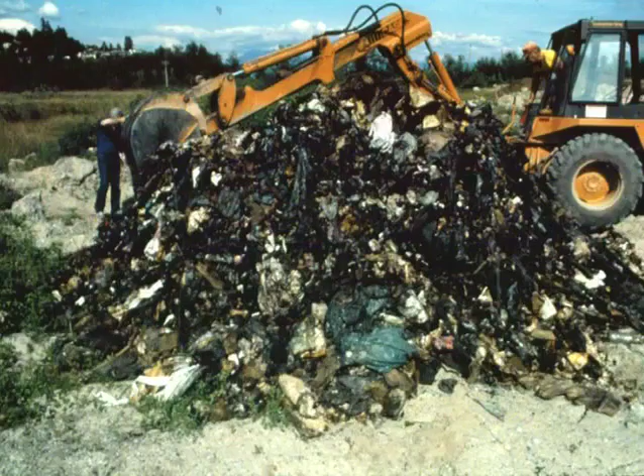First of all, I want to show you what material we're talking about. This is garbage. Jean-Louis tells me that I'm very good at presentations, in fact it borders on excellent, but I'm excellent in telling people what not to do, he says, and he said please don't do that this time.

Well, I'm going to at least suggest to you that this material does not lend itself to vane testing. It doesn't even lend itself to the Briaud pressuremeter. It doesn't lend itself to almost anything. This is what it looks like when you dig test pits, and there's not much you can do about it. That happens to be a trophy I just found, an old hot water tank.

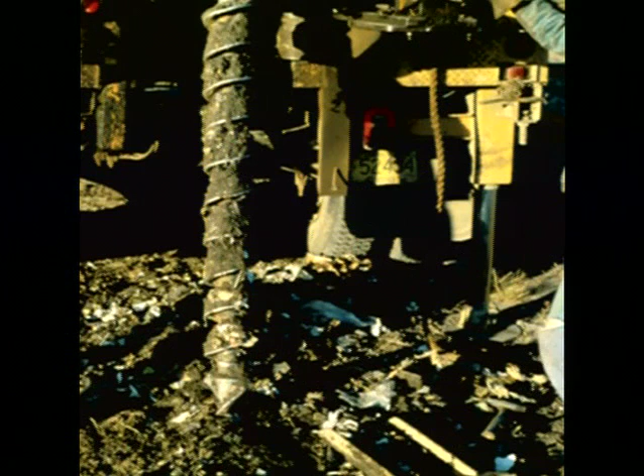It's possible to use augers, and I ended up with a minimum size 6-inch solid stem auger. You can get samples in just about any garbage, and I've tested them all the way from Paris to Vancouver to Florida.

If you use a Becker drill, though, well, you shouldn't. That's what's going to result, it's going to get plugged right away. So to use a Becker drill in garbage, in landfill, seems to be impossible. I certainly wouldn't recommend it.

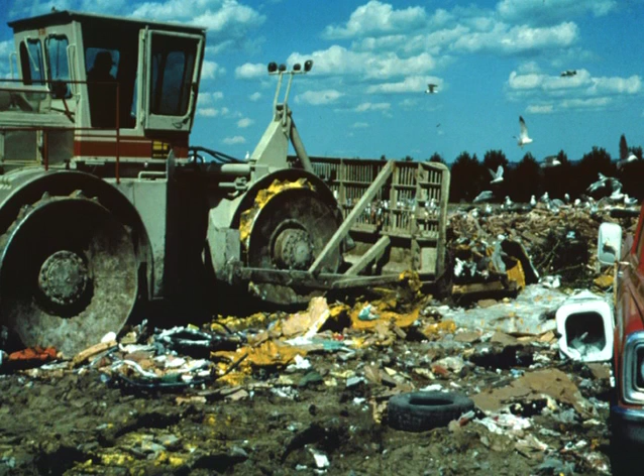Compaction in garbage, in landfill, certainly is related to ordinary, conventional compaction, but usually what you do in conventional compaction is getting the grains closer together. In garbage, you want to crush the grains, so these pallets here, when you let the right kind of sheep's foot type roller compactor on it, you crush the thing, and you do the same with the steel drums. They practically disappear. If you don't do that, you end up with a lot of voids in the landfill, which you don't want, because it will deteriorate, it will decompose.

Classification of this stuff means that you simply have to separate these things apart, take them apart, and this happens to be... if you can't see, if you can't read, it doesn't really matter. What matters is that you have all these different constituents. Paper usually is about 40 to 60%, and so on.

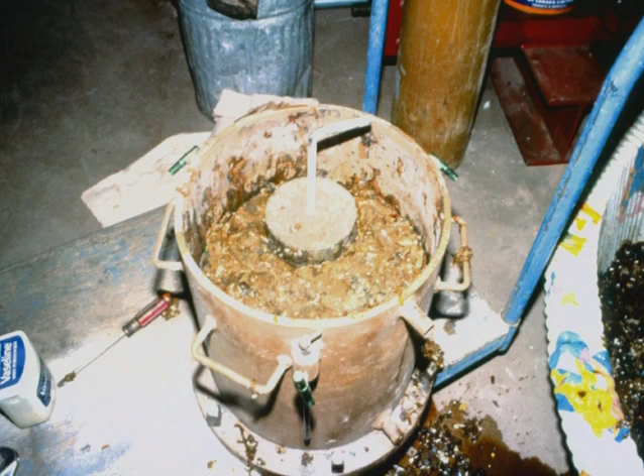The technique that I finally ended up with was to take samples either in test pits with an excavator or a backhoe, or with a bucket auger. Fairly expensive, of course, but that works. Then reconstitute the samples in the lab to the same density, and then test it.

What you're looking at now is compressed garbage, compressed fill, refuse, and it's pretty dense when it is compressed. You, in fact, don't see any voids. The void ratio of a compressed garbage is very small, and it means, for example, that the water content is not all that important with respect to unit weight.

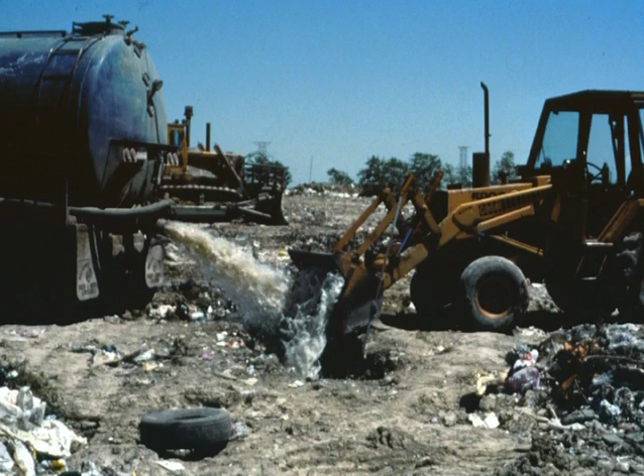And finally, we're looking at sort of a Mickey Mouse, but a large-scale percolation test, where I just got hold of one of these big tanker trucks, and then used a little backhoe there, filled it with water, and did the percolation test.

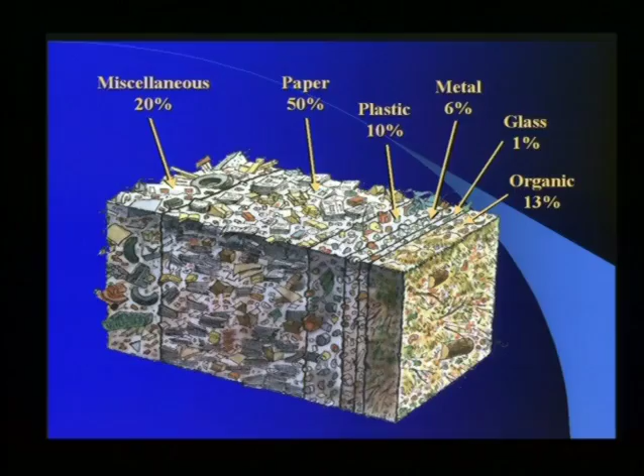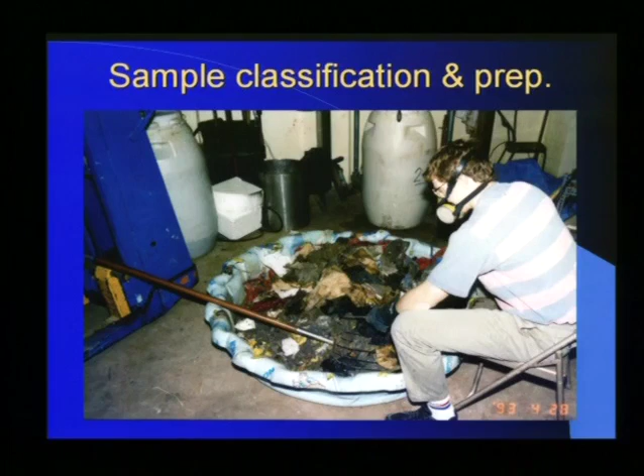And they are very nice to turn to when you have to classify the stuff. They are separating and having fun. Another graduate student who survived, and he has a pretty good job.

Garbage, when you read papers about garbage or landfill or refuse or MSW, whatever you want to call it, you often find a whole lot of negative stuff. People saying how difficult it is, how difficult it is to determine things. It's not quite as hopeless, I think, as people seem to think.

For example, we know pretty accurately the specific gravities, or as I've called it here, the unit weight of the solid constituents. We know that the paper products, the paper, is organic. So organic is 14, and if you're not used to kilonewtons per cubic meter, then 14 would correspond to about 90 or something like that. 70 is of course metal, that's steel, that's very high, so it's about 7 times 62, so it's over 400. And you're all familiar with these things.

We know the specific gravities. If we could just separate these things, and we can do that given enough graduate students, then we can actually calculate the average specific gravity. And from there we can go back to soil mechanics, and we can find out void ratios, except we do have to distinguish between intraparticle and interparticle, that is, between particles or constituents and inside them.

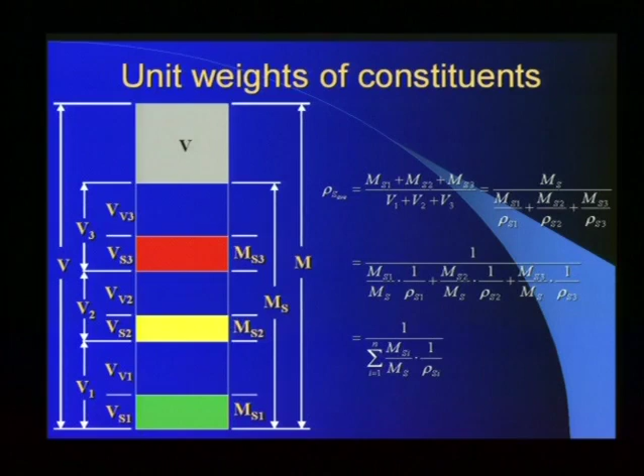The colored portions are 3 constituents, just picked at random, 3 different ones, and you don't have to read the equations. It's not difficult to understand, because what the first one says is that the density is equal to the mass divided by the volume. So there's nothing new, except now you have 3 different masses and 3 different volumes of them, and we can pretty much measure that. We know the densities, and we can weigh them. So since we can weigh and since we know the densities, we can find out the average density, which is the last equation there, just a summation of all of them.

And densities, up till really just very recently, I had the same tendency as we all seem to have. We look at some figures and we say that's not possible, our theoretical considerations show that it can't be so, and so on. I have tried to stop doing that and actually looking at results.

All those yellow dots there, the little squares, are measurements I did myself. So I know there's no cheating, I just took the thing up, excavated it, and weighed it on reliable scales, which at times I made sure were calibrated. And I measured the volume with the thing we tongue-in-cheek called the pitometer, which was just a long stick with what happened to be a pump down there, and we measured the diameter, or rather the width of the pit, and the length of it, and so on. We measured these things at 50 different points, and then it was fairly reliable, I would say. And you see those results there.

Now, it's very typical to say that the unit weight is very important, of course, for stability calculations of the stuff that is underneath this. For example, the Fresh Kills on Staten Island, 500 feet thick. It will never fail, in my opinion, within the garbage. But underneath there is a soft clay, and that might fail if you're not careful. And of course, then it's going to be extremely important to know what the unit weight of this stuff is, and also what is the lateral force that it can exert. So we have these two things that we have to find, and I think I have found those, and I now believe those high values.

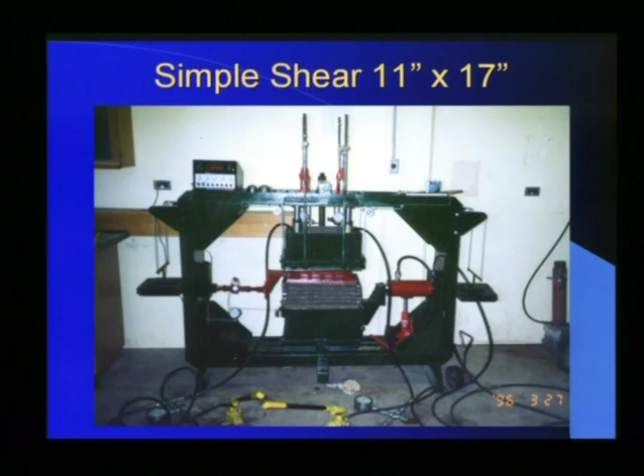So 11 by 17 is a minimum, like a foot long and a foot thick or more, because the material is of course rather coarse. That one used to be a direct shear, but I fixed it up so we could use it as a simple shear.

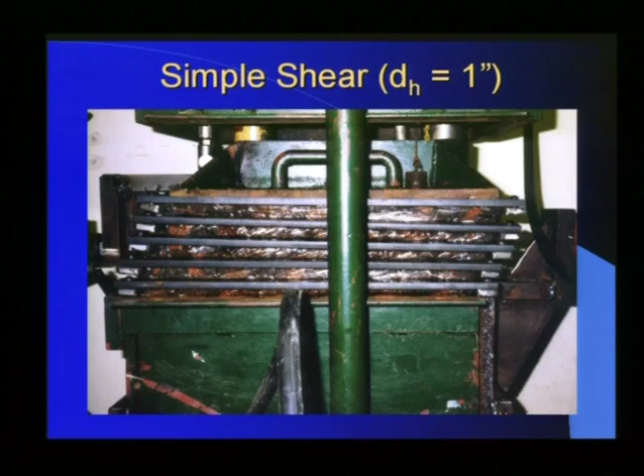Simple shear before the shear, after compression and before the shear, and after about 1 inch of deformation or displacement. But the important difference between direct shear and simple shear is that in simple shear you know the actual shear strain, which equals the horizontal displacement divided by the thickness of the shear zone. And you know what the shear zone is more or less exactly, so you can get that.

Just another picture of compressed garbage. It looks different - you'll recall the first slide I showed you, all that stuff. And now this one is very, very dense. No wonder it has a fairly high unit weight.

The shear, if we go back to direct shear, there is a tendency to always use C and phi, as you Americans call it. C and phi, I mean it's there to stay, so there's not much we can do about it, except that I insist these values will depend on the direction of shear.

You can just think about a deck of cards. If you try to shear it in direct shear or simple shear along the cards, it's very, very easy to do that. But if you try to shear it across the cards, you will have some problems.

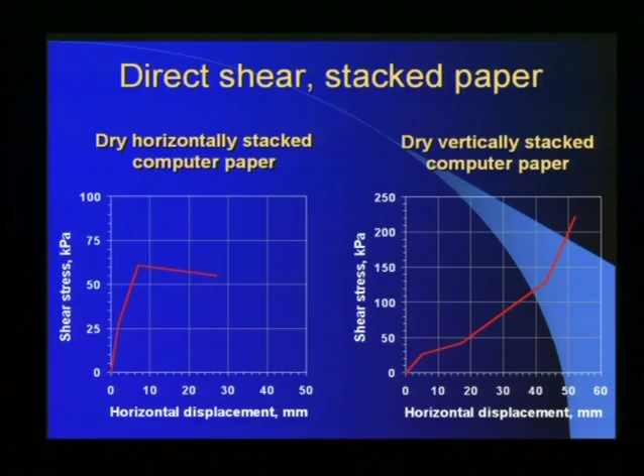To the left, dry horizontally stacked paper reached failure, sliding, at whatever shear stress you see there - it doesn't really matter. What matters is that when you go to the vertically stacked paper on the right, it's a whole lot greater - in fact we couldn't test it, we would have failed the apparatus. We had to give up at 50 millimeters, and it was 4 or more times the shear of the other one - it would have been impossible to fail it.

We should learn something from that, considering how landfill is made and how it's placed. We know that parallel to the lifts placed by the trucks and compactors, the shear strength is at its minimum, and across it's at its maximum. So it's important to find out how the landfill was placed, and often you can find that out.

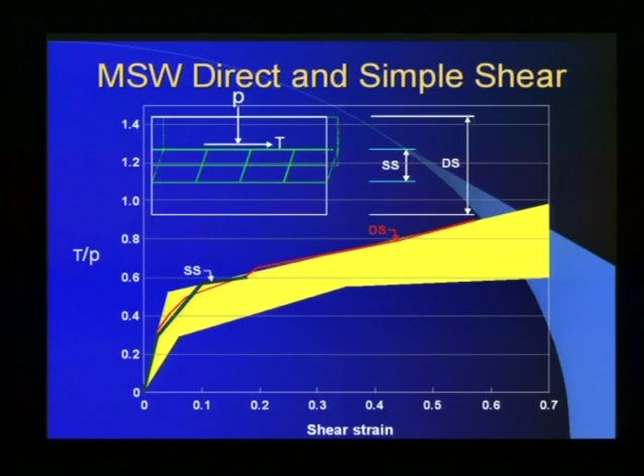The simple shear stops there, and the direct shear stops there. Typical of this, and I found the same thing with other materials, but that will be another lecture. I have found the same trend for Norwegian quickclay, for rockfill, and for peat. They always seem to have this bend, and I remember discussing that at some length many years ago with Bjerrum in the lab. He and Kjaernsli were discussing this, and we never really came to a conclusion of this. Why does it do that? Why does it sort of go around this bend and then continue and never stop?

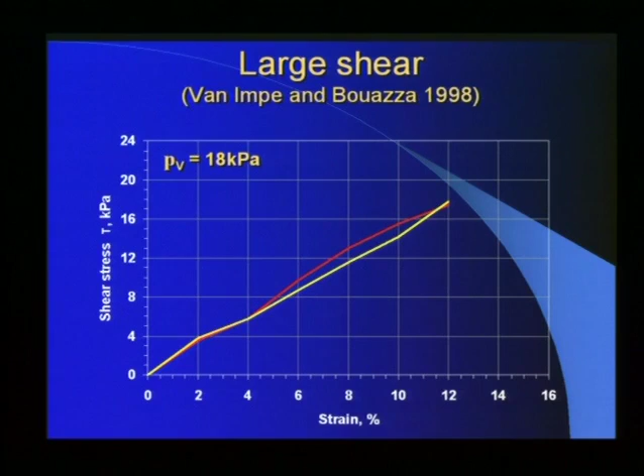And that's what it says in that paper - no maximum was reached. So therefore, of course, what people resort to is to use that point there, because that's the largest you have. But that's not failure at all. What happens, in my opinion, is that one down there. You push there, and then you push there, reaction there, and of course you have something maybe not quite as neat as that - maybe it's bulging or something. But what you're doing is a lateral compression test, and you cannot expect any maximum.

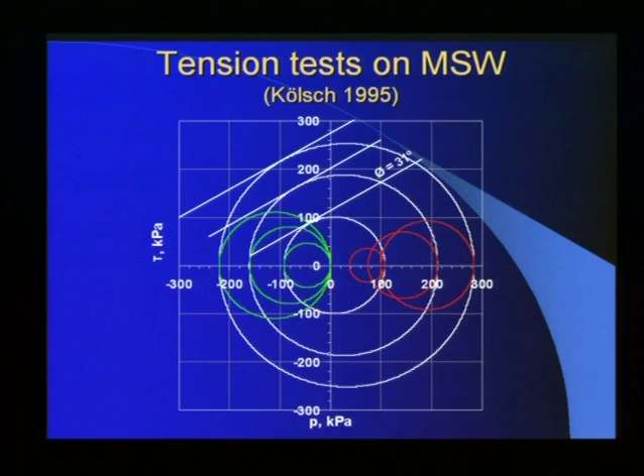Here we have load cells, and the point is now that we let the thing try to split, and then we measure with the horizontal dial gauge how far it goes, and with a load cell what the horizontal load is, and hence we develop the lateral stress. And of course we can use this for K0, so we can measure K0 pretty accurately, and Ka as well.

We can just let it go, and then when we let the ring go where it wants, we can even do an unconfined compression test, and in the process we can measure Poisson's ratio. So it developed into quite a big test. As you can see, it's 2 feet or 600 millimeter diameter.

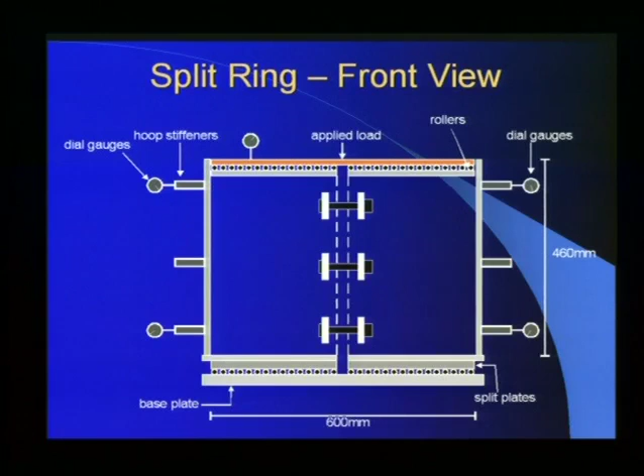From this view here, half of it is taken away so that you can see how dense it is, and you can see that there are rollers there. These plates are split so that it's free to move. Everything was calibrated, and we got some rather interesting results with that.

Typical compression numbers are 0.25. That applies to many types of landfill, but of course it varies between 0.1 and 0.6 or something like that, but 0.25 is fairly typical.

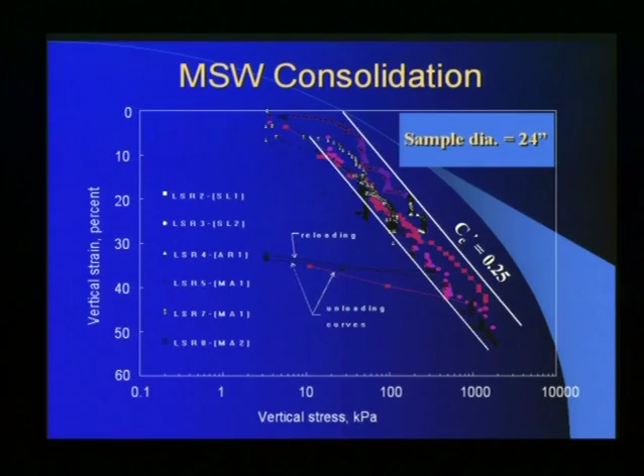So this is just a consolidation test, but if you now look at it, take out a typical one here—you'll find, and I wish Bjerrum was alive so he could see this, because if you ever looked at the typical Bjerrum material, this is it. Garbage. It does exactly what he postulated, what he predicted the material would do.

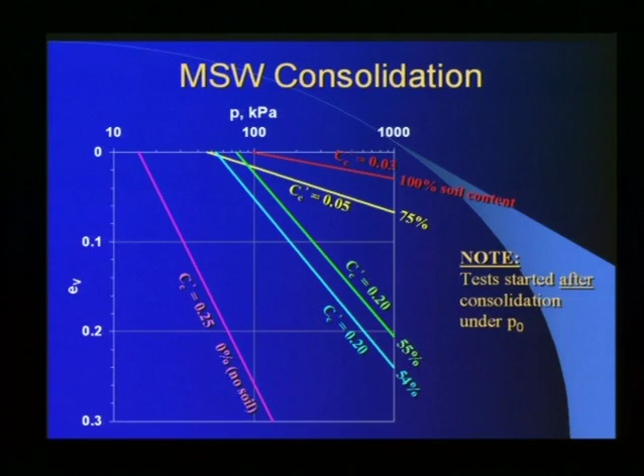So if there's 100% soil content, you might have 0.03, and if you have no soil content at all, you can expect to get this 0.25. Interestingly, there is very little difference between 50% and 0% earth. And if you think about it, that's not surprising, because at 50% you have the soil in between the voids of the garbage, and the governing behavior there is that of the garbage, not that of the soil. K0, then some values here.

We need to spend a few more seconds on this slide. First, you have the dashed curve, which is the typical relationship I suggested: the higher the percentage of fibers, the lower is K0. The red points, 1 through 5, are actual tests. I took the liberty of extrapolating the curve up here, because it would have to end up around 0.5 or so.

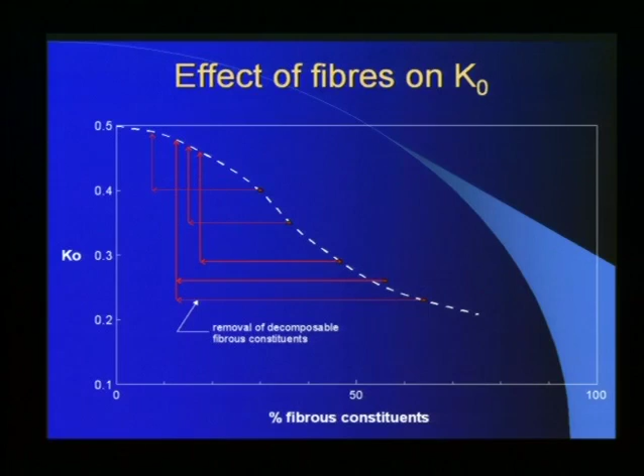Here you just deduct the percentage of fibers, and I was surprised by the result—it's quite consistent. For all five materials, as you remove the fibers and go back, you get that number simply by classifying and weighing. Then you go vertically up and find they're all between 0.45 and 0.48 or so, which is what you'd expect for a fairly loose mineral soil without any fibers.

That's important for predicting the long-term behavior of this stuff, because you can expect one thing: this decomposable material will decompose. It will disappear. One interesting thing of interest to people who deal with earthquakes—though it doesn't have to be earthquakes, it can also be static.

You measure a K0 value, in this case 0.4, and then you relieve the pressure on the split ring. You're trying to get Ka, which for sand is very simple, as we did with the split ring, giving us something like 0.3 as expected. But in this garbage stuff, which was reasonably fibrous, we just couldn't even reach it.

Finally we reached 0—went down from 0.4 all the way down to 0. So that was one thing we found out from that test.

Another interesting thing we found was that if we reduce this very quickly, within seconds or maybe a minute, it came right down to 0 right away, no problem at all, and stayed there—which ought to be of interest to earthquake engineers. I'm not one, but I can feed this information to them.

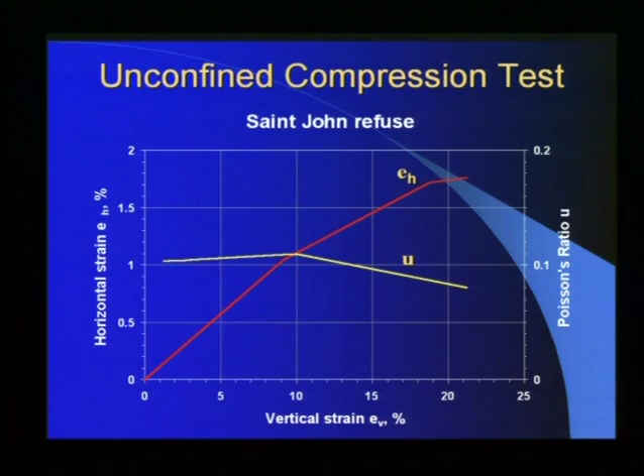How do we go on from there? We have to be careful. The normal so-called relationship used is that the settlement is proportional to the logarithm of time, and that's the popular concept. And of course that concept is physically impossible, because if it carries on like that, the whole landfill is going to vanish and end up as a hole in the ground. It just never stops, so that's impossible. So we have to introduce another equation. This is a little bit unconventional.

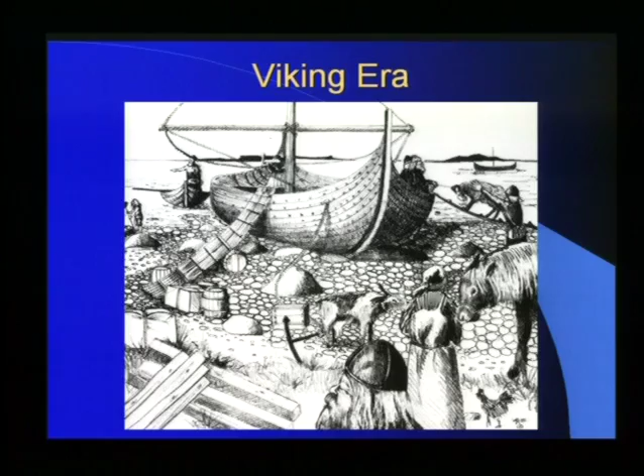This is from my forebears, the Vikings, and we happen to have a whole lot of Viking stuff which we can investigate, and it's there. It has not decomposed - it has decomposed partly, but not totally. We have these ships, and we have to realize it takes more than 1,000 years for it to decompose. I've been talking to archaeologists and chemical engineers, and we've come up with a maximum figure of time required for decomposition, and the figure I've come up with, the maximum, is 10,000 years. Now we're getting back to glacial time, which is quite tidy. So all decomposition, we should be able to find things almost back to the glacial time. But 1,000 years, we know that for sure - that we can look at today.

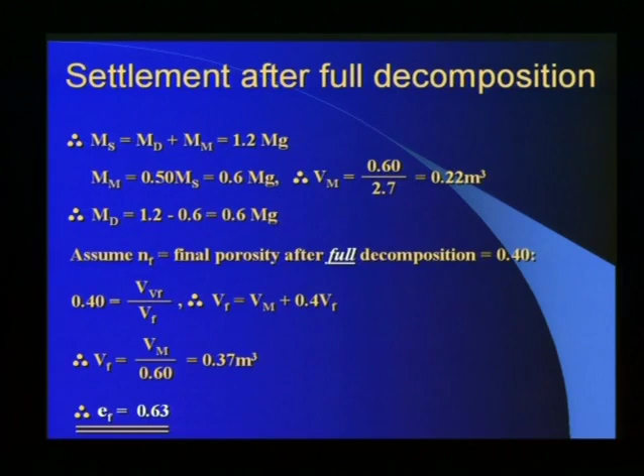Then I went to the Department of Mathematics because my mathematics has become somewhat rusty over the years, and we developed that equation. That equation gives us - we have that final point now, the porosity there, the final - I used 0.6 instead of 0.63, so it's in that same order of magnitude. So we have that. We have the 10,000 or 100,000 months or so, 120,000 months. And when you get up to those high figures, it's not really all that important whether it's 1,000 or 10,000 years, because the Viking era is about there. So that doesn't make a whole lot of difference.

In 1,000 years, it'll decompose 90%. So we have a new curve, and I've started to use that relationship. And besides, I have no hesitation telling people what's going to happen in the next 1,000 years, because I won't be there to check it anyway.

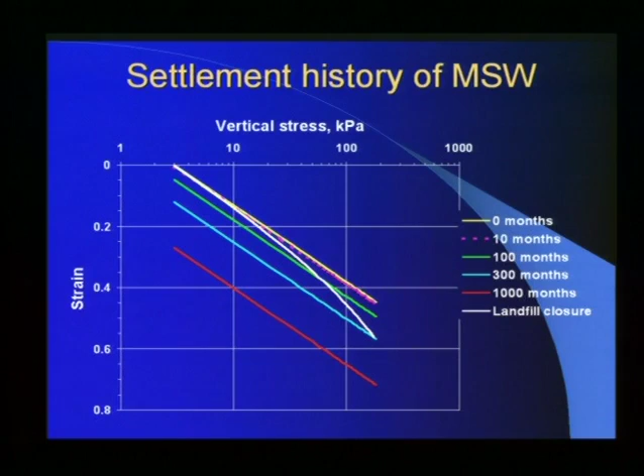You can develop several relationships. I'm getting to the very end here. The vertical distance between the parallel lines is that relationship we just looked at, the mathematical expression there for settlement, and the white line is the end of construction of the entire landfill. So now we can start looking at what happens from now till whenever, going from the white curve on, and then you can calculate things.

You can calculate this also in terms of dollars, because I was just working on a project in Delaware, I think it was, and they were using 10% settlement. I told them that by the end of construction they would be closer to 30%, and apparently that represented millions of dollars of savings. So this is not just academic. And I think finally we have, I found a reference.

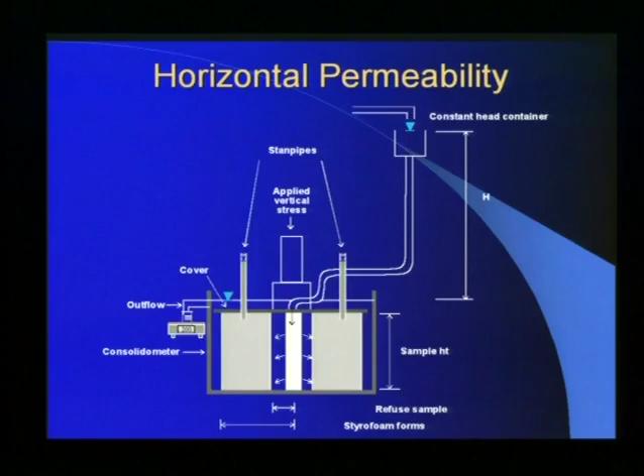I just wanted to show you that it's sometimes of some importance to get the permeability of the material. We have this 2.5 foot diameter setup where you put water in the middle, and then you measure the lateral spread. If you're interested in the permeability of landfill, of garbage, it's somewhere between 10 to the minus 5 and 10 to the minus 4 meters per second. Thank you.

These tests that you've developed, they're only in your laboratory, are they? Yeah. So if people want to run some tests like this, they've got to call you? Yeah. Well, not necessarily.

They did develop the consolidometer, a large one, and also the simple and direct shear for that OII, and they were done by GeoSyntec. I don't know where that apparatus is, but it apparently cost them about $500,000 to make it. It was very elegant. This is the prototype, and they went up to UNB to check that. Mine is a Volkswagen and theirs is a Cadillac.

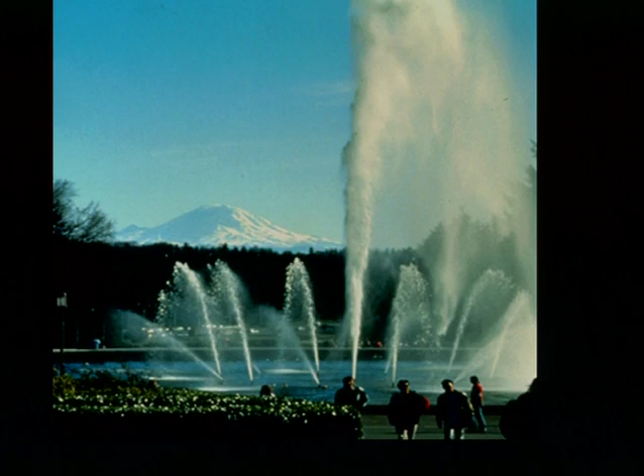If you go to the ASTM standard D4439, you'll see geosynthetic defined: a planar product manufactured from a polymeric material—that's where the synthetic part comes in—used in contact with soil, rock, or other geotechnical material as part of a civil engineering project. It's a fairly general definition, but it captures the key words: a planar product, in sheets or strips or similar form, used with a geotechnical material in some kind of project.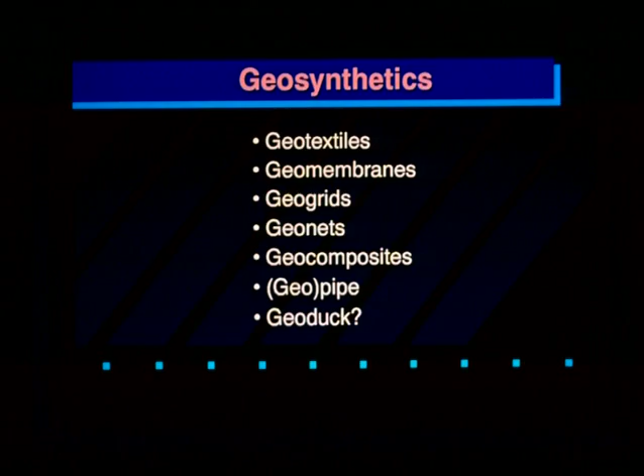Professor Koerner talks about geopipe. He probably mentioned that when he gave the Terzaghi lecture here. And then if you're from my neck of the woods, in fact at the Brio party, I'll tell you after a couple of glasses of wine what a geoduck is. There are a lot of products.

When I first started playing with these materials in the early 70s, there might have been 5 or 6 of them. Today there probably are 600 manufactured in the world of grids and nets and composites and all sorts of different kinds of fabrics and textiles and so on. The range of products that are available is really phenomenal. And this is a benefit as well as a little bit of a problem.

In the earlier days, you had 1 or 2 products that you would use and that was it. If it worked, great. If it didn't, you didn't try it again. Today, you've got all of these products available, and this gives you a tremendous selection - probably there's something out there that will solve your problem. And that's a tremendous benefit, I think, to the engineer.

The polymers that are common are polypropylene, polyester, and polyethylene. Polypropylene, the black plastic that goes into garbage bags, is an example of that polymer. It's a really inexpensive polymer. Polyester, my trousers are made of polyester. It's a very common material in synthetic polymers for textiles, such as clothing.

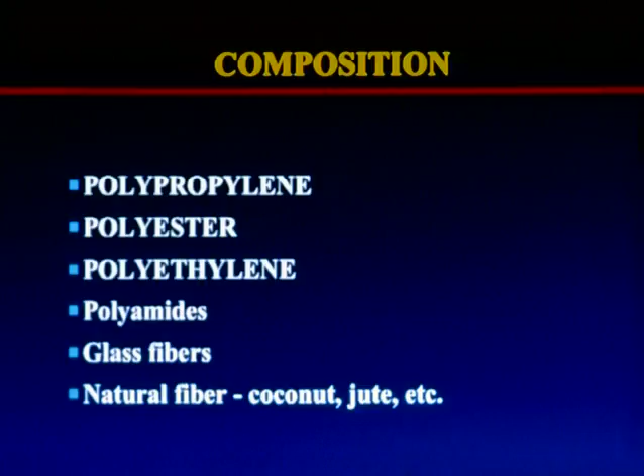Polyethylene is used for sheets, for example, in the geomembranes. It's a very common geomembrane material, as well as pipe and some geogrids. That's the great bulk of all the geosynthetics - those 3 polymers.

This slide lists the primary applications of geosynthetics. Drainage and filtration, erosion control - that's the hydraulic side of the business, and also in environmental functions. Roads and railroads, that's the hard side of transportation. The reinforcing, I've mentioned embankments, slopes, and walls. Those are what we'll speak about the rest of the time today.

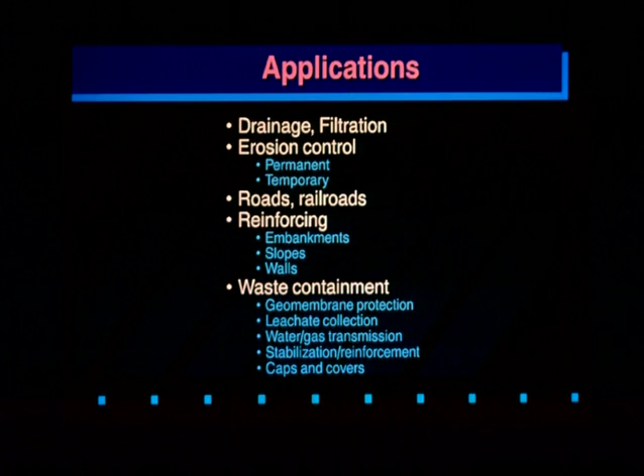And then in waste containment, there are a whole myriad of applications for geosynthetics. We don't have time, obviously, to go into the details of those, but in the references I've given you, you can follow up on that.

Can you design with geosynthetics? Yes, you can. Today we have design procedures, we have properties, we have all of the things that we need to approach design of geosynthetics like you do any other civil engineering material. You can do this from a generic point of view. You can select products generically. You can write specifications. You can do design in the same way that you design with steel or concrete or soil, timber, or any other civil engineering material.

Don't do that. The properties - and this is one of the things that's really developed in the last 15 or 20 years - is ASTM has been extremely active in developing test standards, materials test standards, for properties that we need for design: the strength, the friction, all the other characteristics, the opening size for design, for permeability, etc. And then, much as we do with structural materials or foundation materials, you have the constructability or survivability properties, a whole host of properties that relate to the ability of the geosynthetic to survive the construction operations. Many of those are index properties, where they don't give you the real strength, but they give you an indication of the strength sufficient to be able to select a product that will survive the construction. And then the third case is the durability.

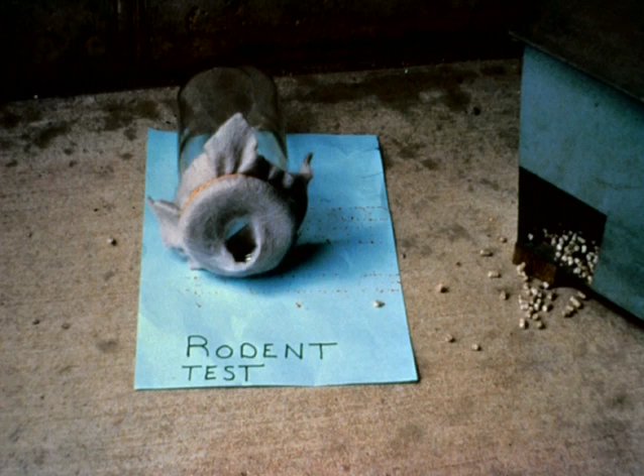Rodents could be a problem. ASTM has worked for many years on the rodent test. They have a standard 1 liter jar. You attach the geosynthetic here and you put a rodent of the opposite sex or some food or something there. And if the rodent eats a hole through it, of course the product fails. If the rodent starves to death, it passes. They've been trying for about 15 years to find a standard rodent. They've tried lawyers, but they keep starving to death, so it doesn't work very well.

So now when you get down to doing your design, you're going to select a geosynthetic. If you do not see improved performance or you don't save some money, you don't need a geosynthetic. One of the nice things about most geosynthetic designs is there's an alternate, the traditional solution. You can use a graded granular filter instead of a geotextile filter. If it's cheaper, you can get it in better, it'll perform better, use it. You don't need to use a geosynthetic.

The geosynthetic solutions a lot of times are cheaper and better, and that's of course why their popularity has increased so much in the last few years. And the other thing is that you can use this as a design alternate for the contractor. If you have a design with and without, that can help you check and make sure your calculations are correct. If you're getting the same kinds of numbers for both designs, it gives you a lot of confidence as a designer, and you get a construction alternate for the contractor to make the choice. So there's a lot of advantages in that regard.

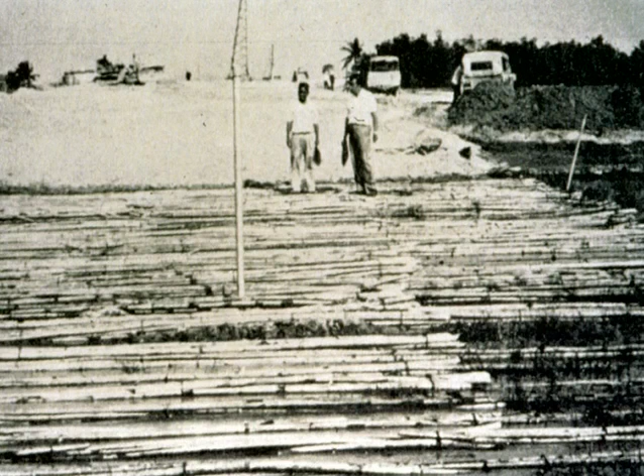Bamboo fascines are used in Southeast Asia. This is a highway job near Bangkok, where they laid the bamboo stalks perpendicular or transverse to the center line of the road. There's about a 5-foot high embankment here for supporting that roadway on very, very soft foundations.

And a modern day version, this is a geosynthetic reinforced embankment, Mobile Harbor, Alabama. Built by the Army Corps of Engineers as a dredged retention dike. They dredged Mobile Harbor, pumped the dredgings into this retention dike. This is a 25-foot high embankment built on material with 60 PSF strength, about 3 kPa. You cannot walk on 60 PSF stuff, you'll sink in up to your armpits. There were very high-strength woven geotextiles used and very special construction procedures used to construct that embankment. It is possible to do.

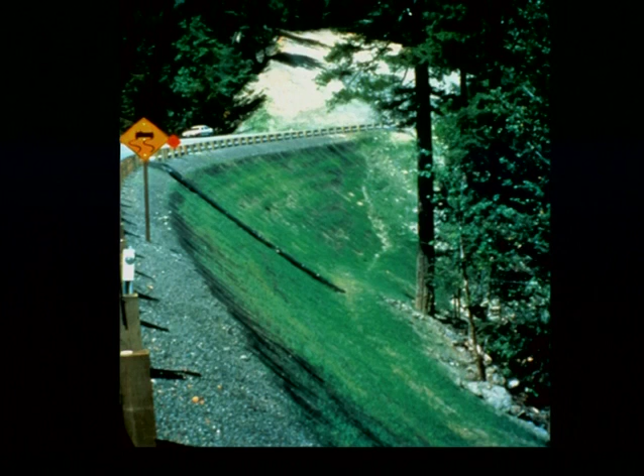Here's a steep slope. I think that tree is vertical. This slope is standing at a much higher angle than 30, 35, 40 degrees, or whatever compacted clay would allow. I don't know what the embankment material is, but by using geosynthetic reinforcement, a very steep embankment slope can be built, and we'll talk about that, and retaining structures. This happens to be a wrap face, geotextile wall, but you can build rather impressive abutments and structures out of geotextiles and geogrids. I'll show you some examples of those.

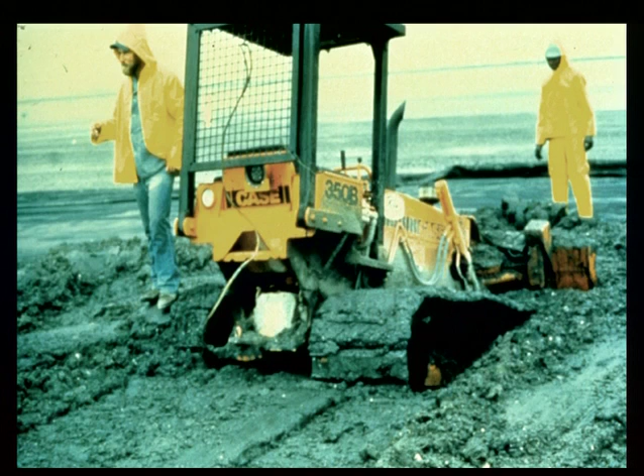So let's start with the reinforced embankment on soft foundations example. This is the case where you've got to build something on a soft site. And you go out to start the construction, and it's a soft site. You've got problems, and you probably have some of those around here. I know we certainly do in the state of Washington. And this is one way that we used to.

I worked on the Highway Department in Minnesota. This is the way we built fills. It was called the displacement method. You just keep dumping sand until it finally stabilized, and you hoped everything was okay. In this case, they've gotten a failure. This is the toe of a slide here, and you can see one here. This is a Corps of Engineers job, so they had plenty of money. You can see how much sand they moved.

You and I would never get a permit to be able to encroach on that waterway, but since they issue the permits, they're able to get away with it.

Now, when you start to look at this problem, how are you going to do it conventionally? I've got a list, in fact I have 2 slides of conventional solutions. You take a basic foundation engineering course, or you're getting into stabilization of embankments on ultra-soft foundations. You've got a number of possibilities. In fact, I think there are about 9 or 10 different possibilities.

One is you can build a bridge. Our structural colleagues like this one. That's one solution, and we call it elevated structure. It's really a bridge, and you can use regular structural materials on that.

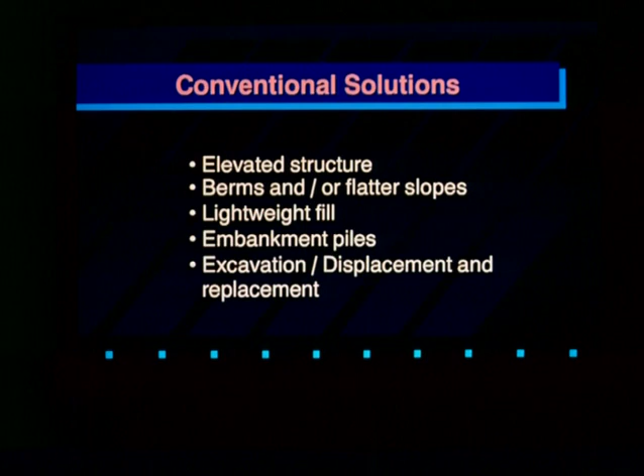You can use berms or flatter slopes, depending on the height of the embankment and how soft it is, just to weight the potential slip surface down and make a wider embankment so that it's more stable. Lightweight fill is used in some cases.

Embankment piles, we were talking about that this morning with some of the students. When you have limited depth to firm bottom, you can use embankment piles. You can't in Mobile Harbor because the rock is 5,000 feet or something like that. Excavation and displacement, or replacement with high-quality graded granular fill, is what's shown on that previous slide, where you either make an excavation and replace it with high-quality fill, or in this case, they just displaced it. So that's another possibility.

Preload and surcharge with or without vertical drains, that's another way to do it. I put in chemical and electrical methods too. If you look through the literature, you'll always find one case somewhere in the world where somebody managed to use electroosmosis or chemical treatment for a soft ground embankment project. Vibro replacement, stone columns, sand columns, cement columns, deep soil mixing, that's another possibility. And finally, reinforcement.

Here's another example of how rapidly developments have occurred. About 5 years ago, I got a textbook written by two Canadians, Francois Tavenas and Serge Leroueil, and a French colleague of theirs, Jean-Pierre Magnan, who wrote a book on embankments on soft foundations. It was published in French in 1985, and about 1995 there was an English translation. I got it, and they had one paragraph in the whole book on reinforcement. They said what most of us would have said 15 years ago: it's kind of experimental, kind of unusual, maybe only in special cases would you use reinforcement.

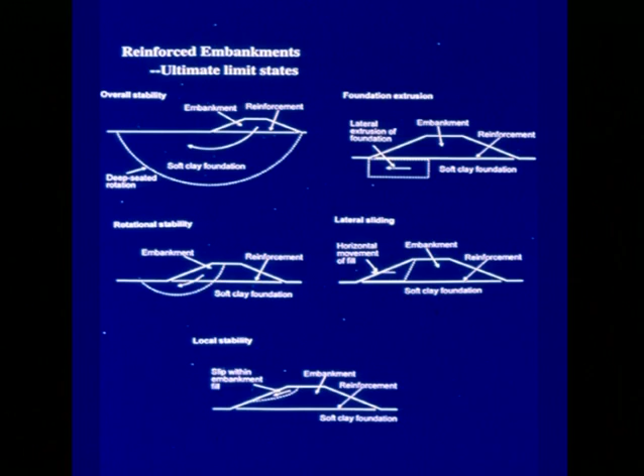This slide lists the design. These are ultimate limit states, the limits we look at for design of reinforced embankments. You have to check all of these because they're possibilities for failure, the ultimate limit states we've learned from case histories and observations of others. Failures are useful as long as they're the other person's and not yours. We've learned a lot, and fortunately federal agencies like the Corps of Engineers and states have been willing to describe some of their failures—we've learned a lot from them. For example, we have to have overall stability, overall bearing capacity of the foundation, or it's just not going to work.

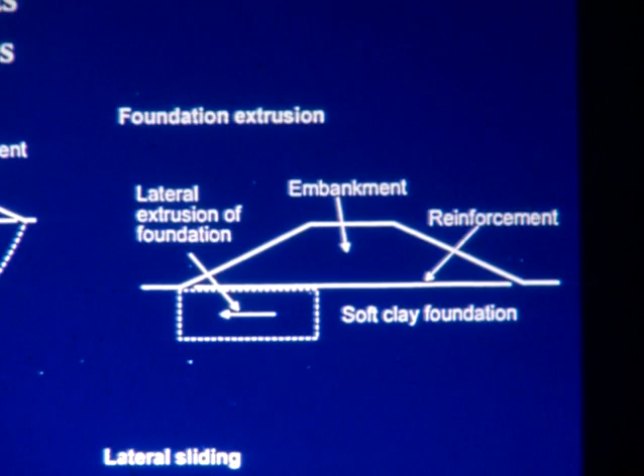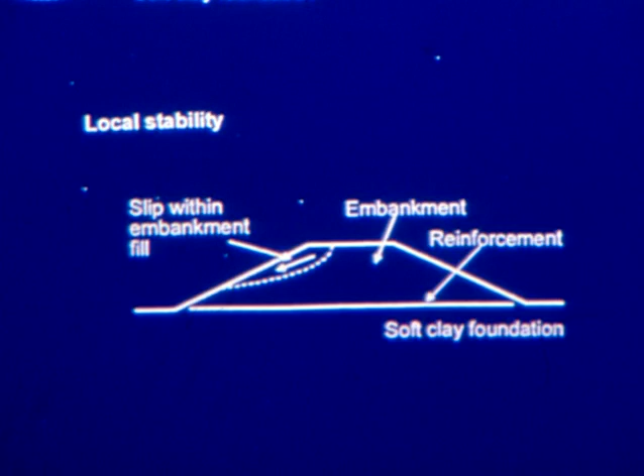It's possible, depending on the soil profile, that the soft clay can extrude out from underneath the embankment, so that's another design check we make to ensure conditions are strong enough for our particular embankment so that doesn't happen. We can get a rotational stability problem, a classical slope stability type problem, and we check that to make sure it's okay. The reinforcement goes at the base of the embankment, and we add that in as a restoring moment to ensure adequate factor of safety. We can also have lateral spreading or lateral sliding of the embankment, and we check that. If you had a very high embankment, you might have a slope problem in the embankment itself. We check all of those to make sure we're okay.

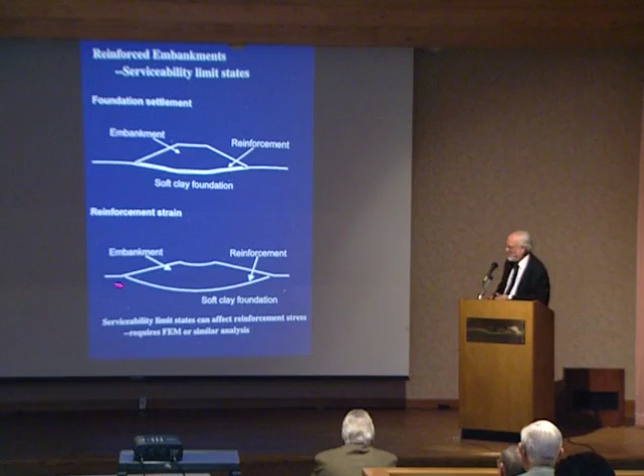We also have to consider the serviceability limit state—the performance of the embankment, depending on the facility and what settlements we can tolerate. So we do a foundation settlement analysis, a classical Terzaghi settlement analysis, and we also need to worry about whether the reinforcement stretches. The modulus of the reinforcement must be sufficient so we don't get so much stretch at the base of the foundation that the embankment settles and is considered to have failed, even though it didn't fail in instability.

The procedures for those design limit states are very well established. In fact, many of them, like the bearing capacity and settlement analysis, are classical soil mechanics that everyone knows how to do. The geosynthetics used for embankments on soft foundations include geotextiles, geogrids, and strip drains, which are used for accelerating consolidation. I put those in the list because they are a geosynthetic, a geocomposite.

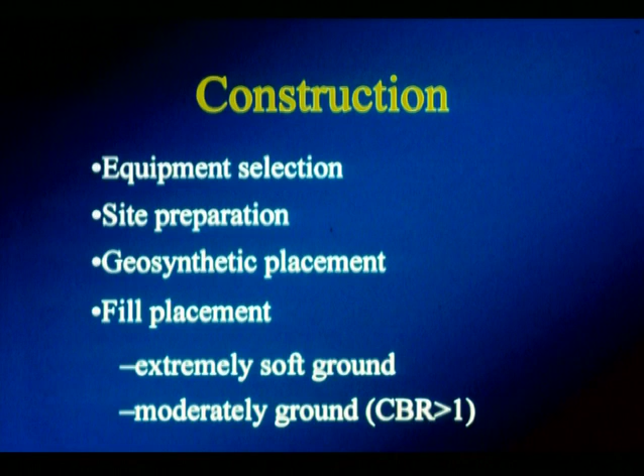Construction is absolutely essential—you have to build it right or it's not going to work. So construction is very important in these kinds of ultra-soft foundation construction projects. You have to have the right equipment; you can't use regular highway construction equipment. Wide track dozers, light equipment, and so on are required. In site preparation, don't remove the mat or root mat—always leave that because it gives you a little extra reinforcement, a little extra insurance. How you place the geosynthetic includes sewing and seaming, and there's a whole host of things involved that I don't have time to go into, but in the paper they're described or at least outlined, and the references give sufficient detail on how to do that. And then there's how you place the fill on extremely soft ground or on slightly firmer ground.

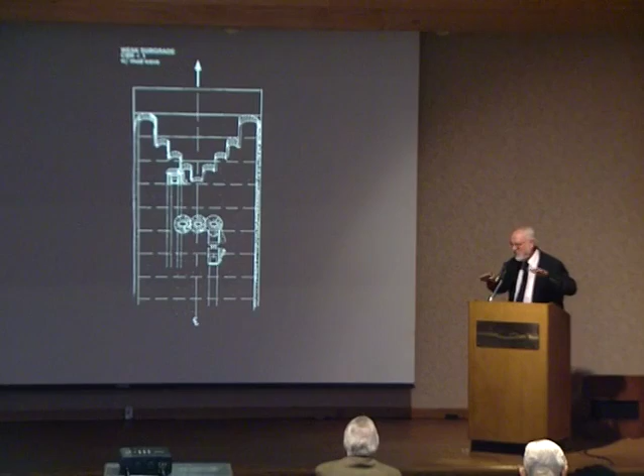Typically, the sheets of geosynthetics go toe-to-toe across the transverse length or width of the embankment. There's the center line, and then you construct a U-shaped leading edge to make sure the material dumped off is on already placed material, then it's spread to maintain the geosynthetic in tension, which helps stretch the fabric. You have to seam or sew these sheets before you place the fill, so that work all has to be done up here. There's a lot of details associated with that we don't have time to go into.

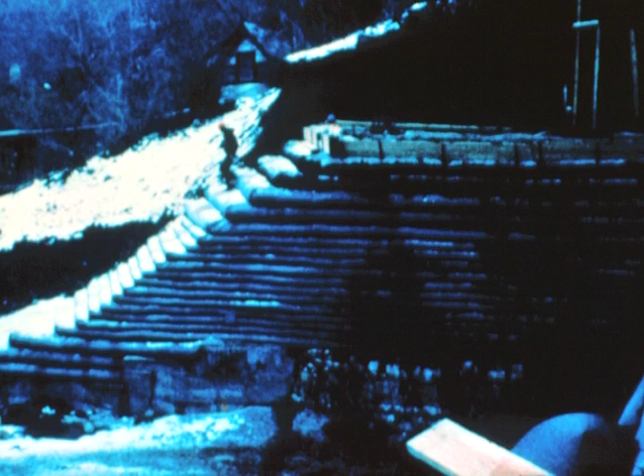The primary strips go back into the backfill, and depending on the spacing of the primary reinforcement, you may require secondary reinforcement at the face. Sometimes these are wrapped around on the face of the slope; sometimes they just terminate right there. The situation is such that what's happening at the face is very local, so you may need to do something at the face just to retain the fill right there. The wrapped-face geogrid or geotextile is very appropriate for that.

What's the purpose of the reinforcement? Well, it's to increase stability, to provide a factor of safety greater than one, and that permits you to steepen the slope over the angle it would ordinarily stand at. There's also been some work on having the geosynthetic right at the edge of the embankment. It gives the roller something to push against, acting as a compaction aid.

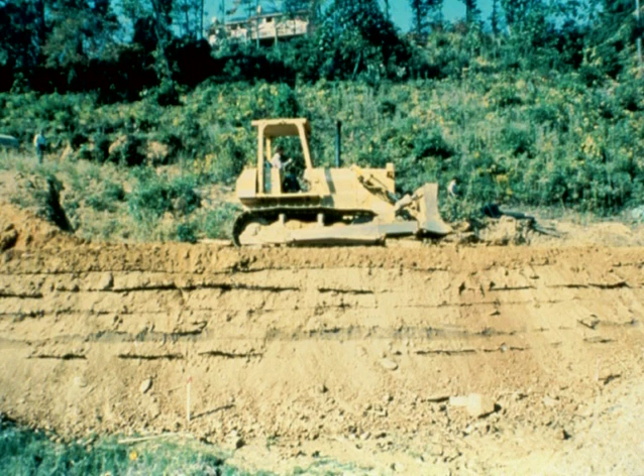That's shown here. It's not a very heavy dozer, as you can see, but here the face is totally gone, and yet it's stable. The reason is, it's raveling a little here and running here, but the earth pressures tending to cause that to slide are rather modest right at the face of the embankment. And this dozer is able to compact that fill very, very well right close to the edge of the embankment, which increases the stability of this material a lot.

Here's a case history of an embankment slope reinforcement job that occurred in one of the very early days of using geogrids. This is in southern Ontario, Canada. It was clearly a railroad failure, a slip out, as you can see. One of the real advantages of using geosynthetics for slopes, and especially landslide repair, is that you can reuse the debris, the landslide debris, for reinstatement of the slide. That means you don't have to haul the old stuff away and bring in selected material; you can use the material that's right there on site, which just happens to be at the bottom of the hill.

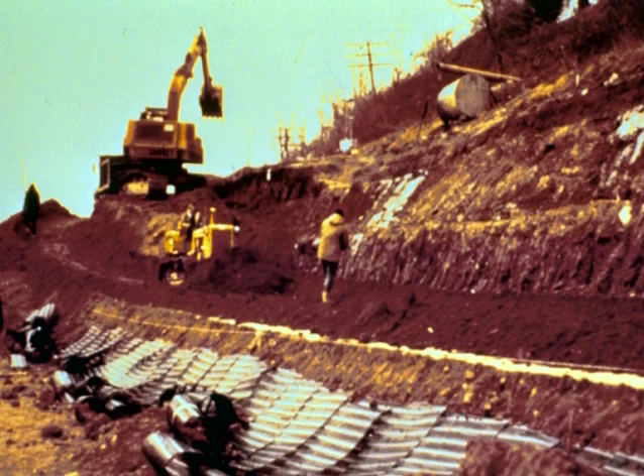Just to show you how that goes: the sheets of geosynthetics coming in, and they're building this slope up. It's a steep slope, you can tell there. Here's a ladder that the guys use to walk up and down the slope. They have to have this fellow stand down here to hold the ladder up, it's so steep. I think this took about three days from start to finish, by the time they got the ballast and the track reinstated. That fellow's still there holding that ladder up.

Very efficient. Here is a slope that was built in northern Idaho on Highway 93, US 93, up in the Panhandle a few years ago, with a wrap-face geotextile slope. They wanted to widen the road for aesthetic reasons, among others.

If you'd widen the road and bring the slope down, this thing would have been way out there and an ugly scar. By using wrap-face geotextile for this very substantial slope, we were able to widen the road and improve its traffic conditions.

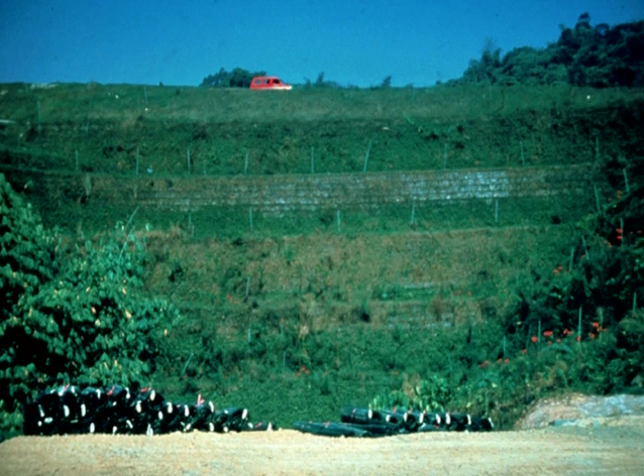Here's a 35-meter high reinforced slope from Taiwan for a housing development. You can see the truck up there for scale. Here are the geogrids that were used. Because of the apertures in the geogrid, and in a warm, wet climate, the vegetation reestablished itself very rapidly. In a few years you won't even know that's a reinforced slope. It's a very good development because of that.

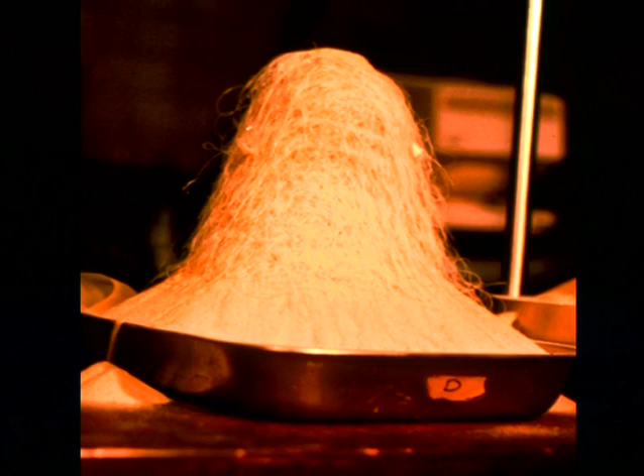Texsol was an invention of a continuous fiber filament reinforcement developed in France a few years ago. This was in our lab. I had a 6-inch diameter tube full of Texsol shipped to me from France, and we lifted the tube off the pan, and the sand ran out. You can tell there's a regular angle of repose, and there's what it is with the fibers.

Basically this is a shotcrete machine with a couple of spools of continuous filaments. High pressure water and sand go out, but they don't put cement in the shotcrete. The fibers develop back and forth and build this up on a fairly substantial slope. This guy driving around in the French Alps doesn't even know that's geosynthetic. Again, if you're in the right climate where vegetation can reestablish itself, you get a beautiful slope system.

Now somebody needs to change my tray so we can finish up with reinforced walls. This is the third area that geosynthetics have really had a tremendous impact, for a reason I'll show you in a minute.

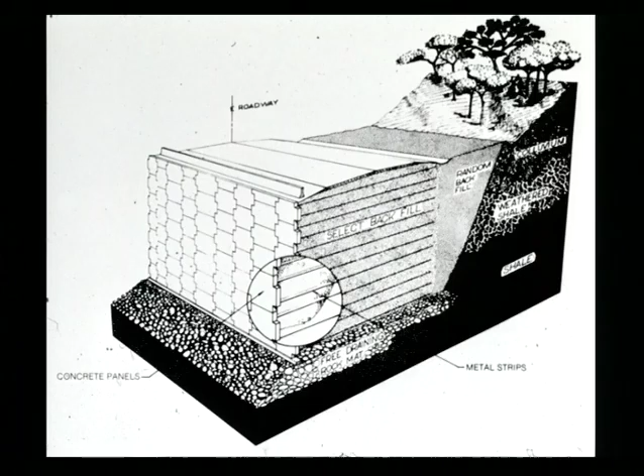You're going to have to cover the face because it's now exposed to ultraviolet light and subject to deterioration. So a lot of times we use shotcrete. This happened to be a test done in Colorado a few years ago, Glenwood Canyon: a 15-foot high wall, shotcrete for ultraviolet protection, and a surcharge. It was a test to see if they could get the thing to move, and it didn't move. One reason is you've got to make measurements during construction or you'll never be able to see them.

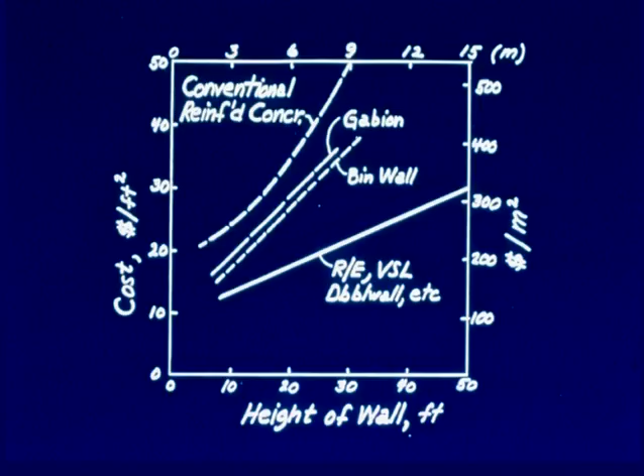Structural retaining walls are just too expensive, I don't care what system it is. Here's reinforced earth, VSL, the steel, double wall, geosynthetic walls. All of them come down in this range here, depending on what you do for the face treatment.

Geosynthetic walls without significant face treatment will sit down in this range, $10 to $15, $16 a square foot. The Washington State Department of Transportation built a retaining wall, I'll show you in a minute, which was 40 feet high in Seattle. It was a temporary wall, so they didn't spend any money on the face. 40 feet, and it was sitting about right here, about $160 per square meter, $16 a square foot. But again, with no face treatment.

How do you design? Well, this should look familiar to anybody who's ever designed a retaining wall. It's the same failure modes that we have for conventional walls. We make sure they don't slide, that they don't overturn, that the bearing capacity is adequate, and that the overall slope stability is adequate. That's standard design procedure for any retaining structure.

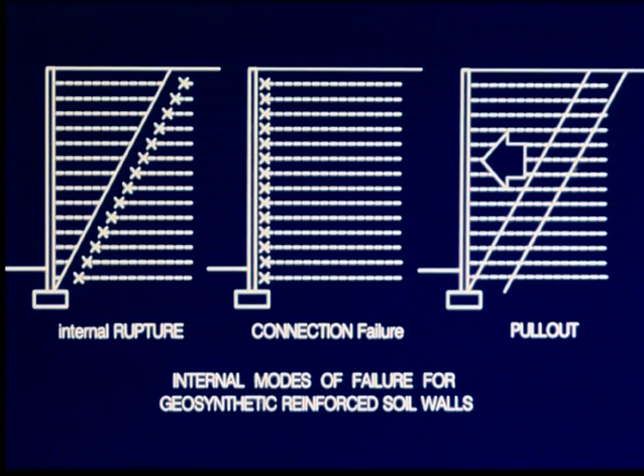Now, the internal design is a little different, but it's not that hard. What you have to do is make sure that the earth pressures don't exert so much force that you rupture the geosynthetic - that it has sufficient tensile strength to withstand the earth pressures. If you're having a face element on the front like the reinforced earth or some of the other systems I'll show you in a minute, you have to make sure that the connection strength at the face is adequate.

And I guess the other failure mode is the whole thing can slide and the reinforcement can pull out of the backfill. So we design for pull out. There are procedures available for these. They're very conservative and they work very well, very easy to do.

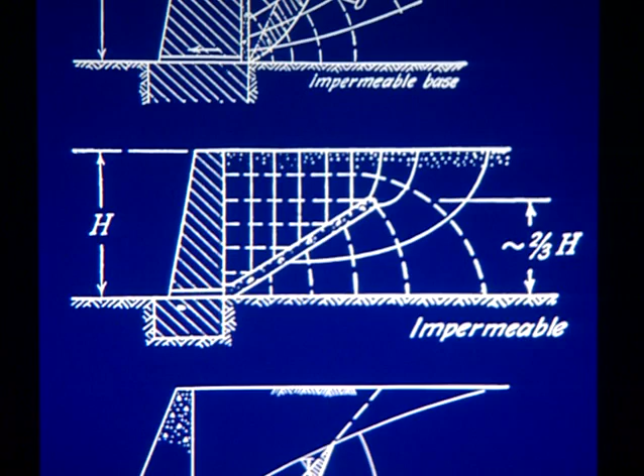Don't forget drainage. It's amazing how many failures have occurred of reinforced walls recently, and almost every one of them, water is involved. Now, it's one of those things that geotechnical engineers say, of course, so what's new? But unfortunately, geotechnical engineers were involved in those projects and they forgot some of the basic rules.

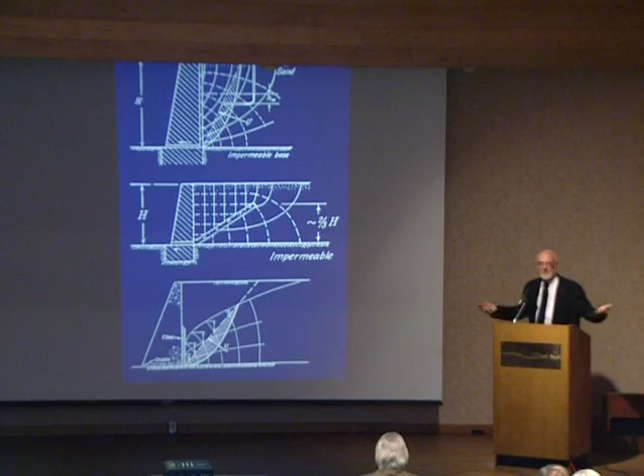Now, these are not new slides. You know where I got these? I got these out of Terzaghi's Theoretical Soil Mechanics, 1943. So this is not new stuff. We've got to remember, I guess we keep learning the same lessons over and over again. Anyway, don't forget the drainage.

Material properties: the soils, the geosynthetic properties for the geosynthetic reinforcement, and the soils and soil mechanics - that's nothing, everybody in the room knows about that. Geosynthetic reinforcement, the two properties you need are tensile strength and the soil reinforcement interaction parameters - basically the soil geosynthetic friction.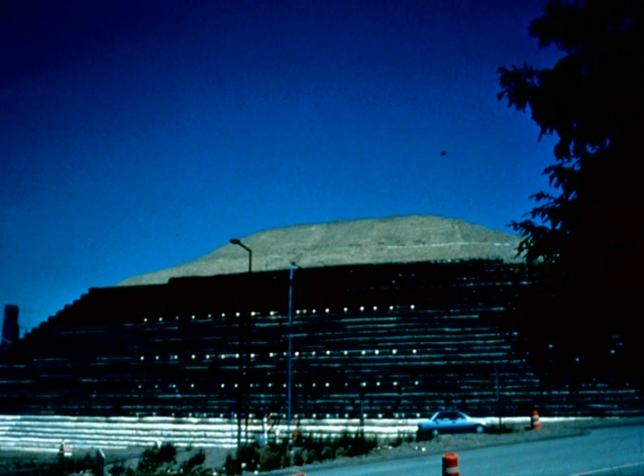This is that 40-foot high retaining wall built near downtown Seattle a few years ago. 40 feet, 20-foot surcharge. It was fairly heavily instrumented, and based on that, we got a lot of research money from the DOT to try to find out why the darn thing works so well. I'll just show you a little bit of the data.

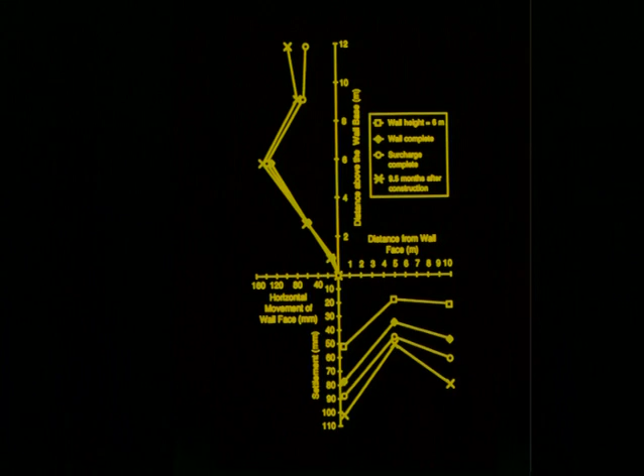In feet and inches, that's, what is that? 5 inches in 40 feet. You'll never see it, you can't see that deflection. And what it points out is you've got to make that measurement during construction. If we waited until the end, we'd never see any deflection. You'd say, oh, the darn things don't move. Of course they don't move, because you have to make the measurements during construction.

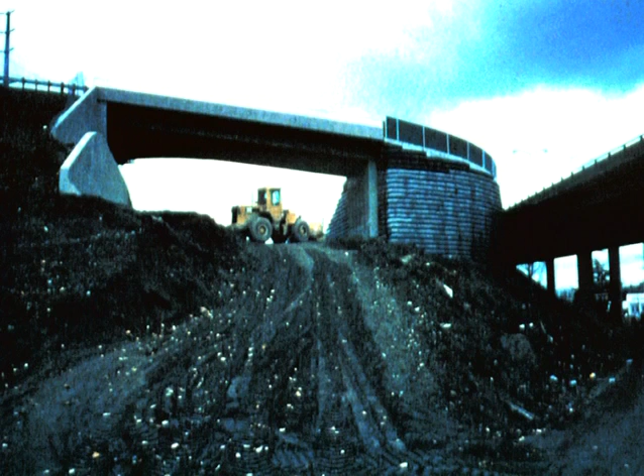I want to show you a couple of other slides. This is another interstate in suburban Seattle, Interstate 405. There's a temporary off-ramp during some construction operations. This is a fabric-wrapped geotextile wall.

And I don't think you can put your hand between this wall, the temporary wall with the geotextiles, and this 3-lane freeway here carrying, I don't know, 6,000 cars an hour or something like that.

The guy that designed that other wall designed this one, works for the highway department. At that time he was not the chief geotechnical engineer; today he is. He has confidence in his design procedures. Can you imagine what that young man would be doing if this wall had moved out and hit that bridge and they'd had to close the road? He'd be breaking rocks at Walla Walla or something like that - that's our state prison in Washington. So obviously the design procedures are conservative and he's got a lot of confidence in that.

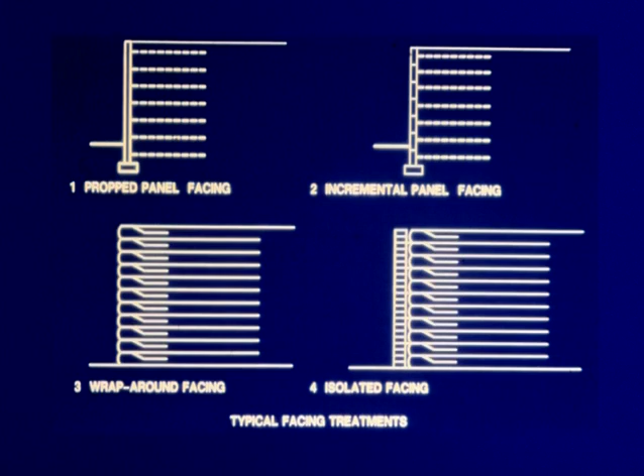Let's talk about facing treatments and finish up in the next 4 or 5 minutes. This cartoon shows the ways we treat the face of a wall. Retaining walls are ugly, and anything we can do to make them less ugly is an advantage. We can have full height prop panels, where you prop or support it during construction as you lay in the geosynthetics and backfill, then remove the strut or panel prop, and it should stay there if you've done it correctly. You can have incremental panel or modular block panels, where as you construct the backfill, you bring the face up. There's wraparound facing, the 2 examples I showed you recently. And you could have a facade where you have large settlements or anticipate large movements - let those occur, then come in later and put a facade, a false front, with architectural treatment. I'll show you a few examples of those.

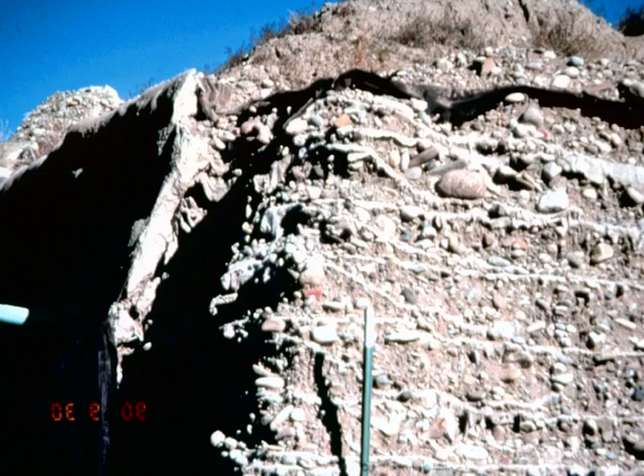They're very flexible, very forgiving materials. And in fact, if you go in where these sheets are, just a few sand grains in, that geotextile is as good as new. Why? Because it's not exposed to ultraviolet. I can show you another slide, a side view of that test pit taken about 10 years after - it's gone through 9 or 10 winters of freeze-thaw. You're up in the Rockies, you can imagine what it's gone through. Here you can see the geosynthetics coming in, another sheet wraps around the face, and they're standing on almost a 90-degree slope. How come it hasn't collapsed with the granular backfill? Well, there's a little silt in there, probably some capillarity that holds it, gives it some apparent cohesion. It's quite remarkable that it didn't collapse. I should think as a designer this is one of the greatest advantages you can ever think of in a structural system - that it's not going to fall down on you. You may lose the face and have to repair it, or it may look like heck like this, but it won't collapse. It's really quite remarkable.

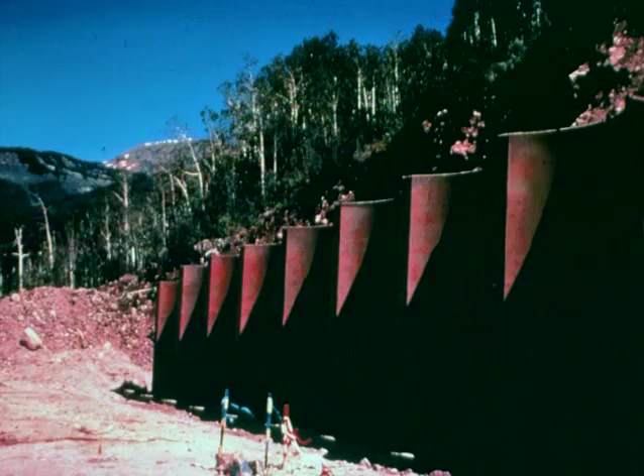Here's some full height panels that Colorado DOT has experimented with using colored cement. These are full height prop panels, but you get the idea of something making them a little less ugly. It's really not too bad - it blends in with the soil, as you can see.

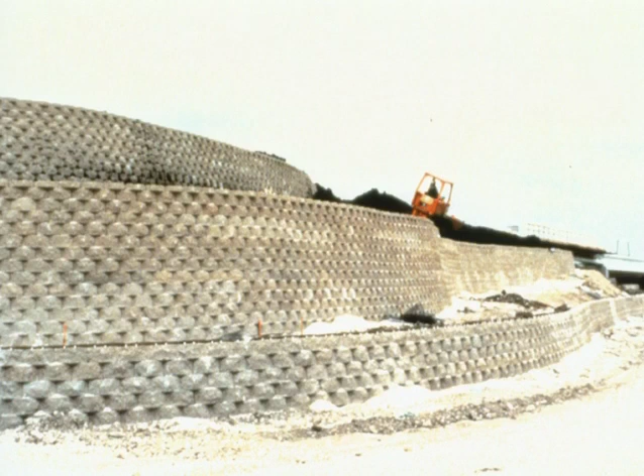The modular block walls that are very popular nowadays - this slide indicates why they're so popular. You can do different shapes and elevations that would be extremely difficult to do in cast-in-place concrete. So you can have vegetation growing here, all sorts of different things, a lot of flexibility in design and construction.

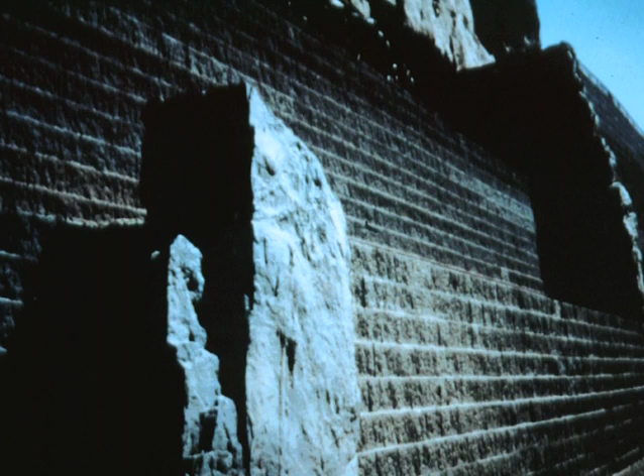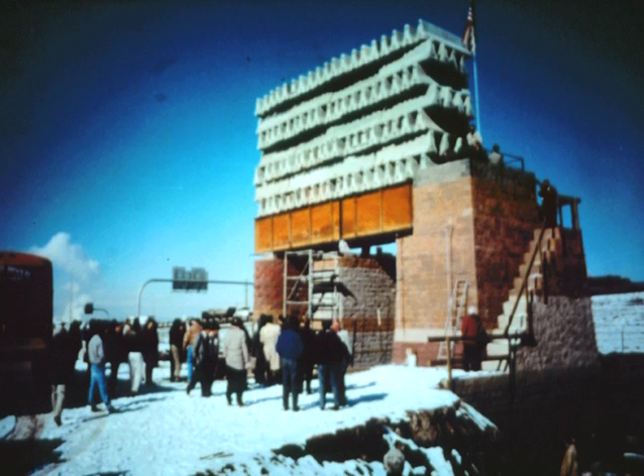He's done some tests. This is reinforced with a very lightweight non-woven geotextile and modular blocks, with a load test. Jacks up here putting all this load on it as a test.

And this is my favorite, Bob Barrett - I'll give him credit for it. That's him right there, this is his wall. You see this reinforced wall? These are bed sheets from Kmart. I kid you not, he went down to Kmart, bought these bed sheets, built this mound, this wall, and stacked up these jersey barriers, and the thing hasn't fallen down.

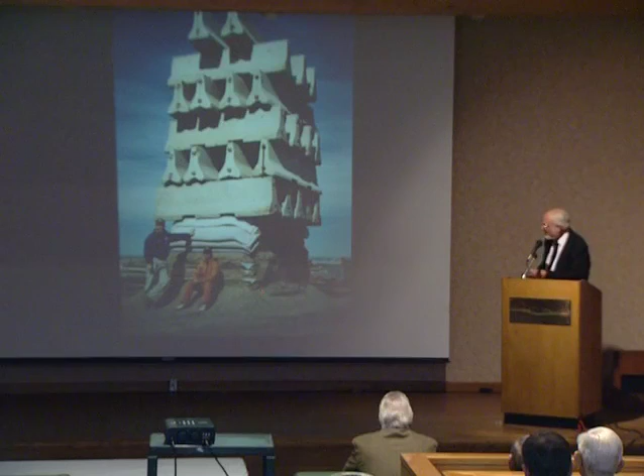Notice a couple other things - the face has gone down here. Now, I don't know if I would stand there, and I certainly wouldn't lean on it like he's doing. I think I'd put my hard hat on and my steel-toed shoes, though I guess it's okay if he pushes it over that way. But isn't that remarkable? With bed sheets from Kmart. It's really quite remarkable, the things you can do.

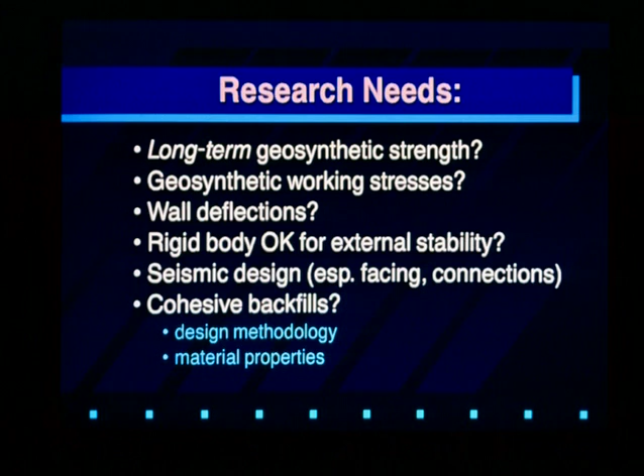I think all these technologies I'm showing you on soil reinforcing have a great future. They're going to revolutionize how we practice for all of these technologies, especially for retaining structures, because of cost - you saw the cost figures, they're so much cheaper. And we found out from studies and behavior during earthquakes that they're very flexible and very forgiving structures. Also, you save a lot of money - you don't need fancy, expensive foundations because they're so flexible and tolerant of differential settlement. So they have a great future in that regard.

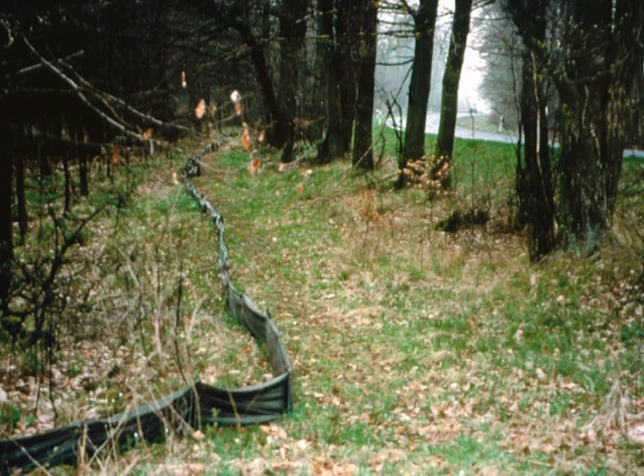Let me finish up by showing you a frog wall. A friend of mine is Austrian, but married to a Swede and lives in Sweden. He goes down to Vienna to see his mother, and he's driving along a road in rural Germany, and he saw this thing and thought, what the heck? He went to the local community, speaking German, and asked what's going on, and they said, well, that's a frog wall.

So I guess that's a good example of German efficiency - somebody's gone out and measured how high they jump and built a fence just high enough. Thank you very much.